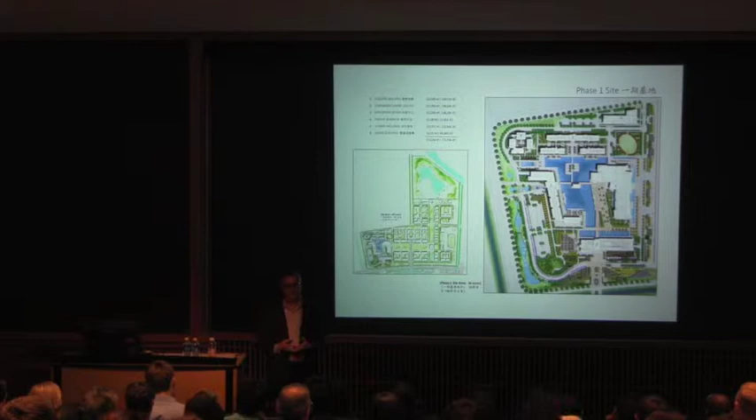One of the things we recognized is there's appreciation for landscape and being part of the landscape, so the buildings and the landscape needed to work together. The other thing is Duke had this mantra, which I think is very sound: learning can happen anywhere. So we needed to create a campus where the indoor spaces, the outdoor spaces, the indoor rooms, the outdoor rooms all worked together to allow learning to happen anywhere.

So what did we do? Well, the water table was basically a meter below the ground, so we pulled it up. We basically said, we're going to create a water quad. So all the water you see in the middle is our take on a quad, and these buildings will be like puzzle pieces that work their way around the quad with bridges that connect them. Then you'll have these landscape moments around the buildings that create an extension of the indoor spaces outdoors — inside out — and you create these learning moments around this beautiful scenery.

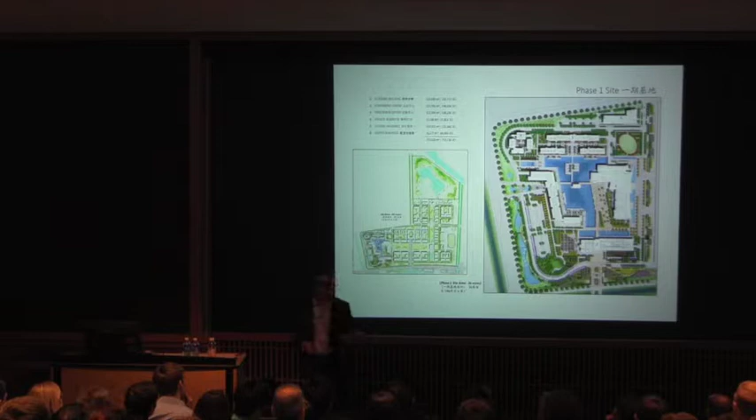There's an academic building, building number 1. Building number 2, a hotel and conference center. Building number 3, a lab and science-oriented building. Building 4, a faculty residence. Building 5, a 200-bed dormitory. Building 6, an administration and service building. They all have this kind of axial relationship.

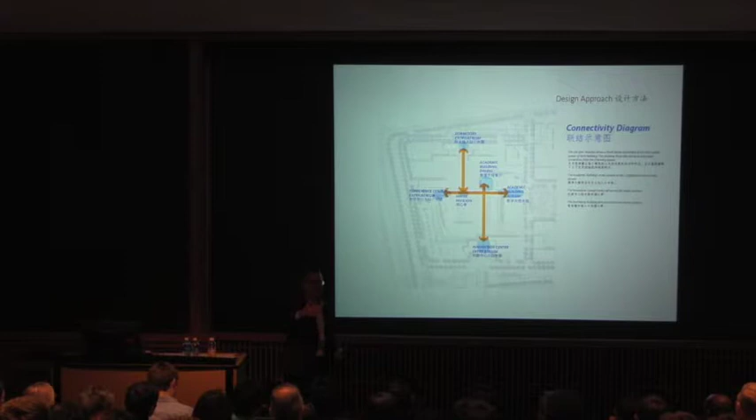As a user at a campus, where normally campus experiences in China are a little more scattered and chaotic, connection to buildings here is very much subconscious wayfinding. I could be in the atrium of one building and look across and see another, and move from one space to the other. I have this amazing experience as I go, connecting with the landscape, but I'm not having to zig and zag all the way through to get from one place to another. And you'll see how we've been diagramming throughout these stories, able to tell a story when language is a barrier, right?

So how do diagrams, which we all do every day, how do we make them as powerful and impactful as possible to communicate, in this case, a user experience both in plan, but also from the sustainability side that could basically bridge the cultures.

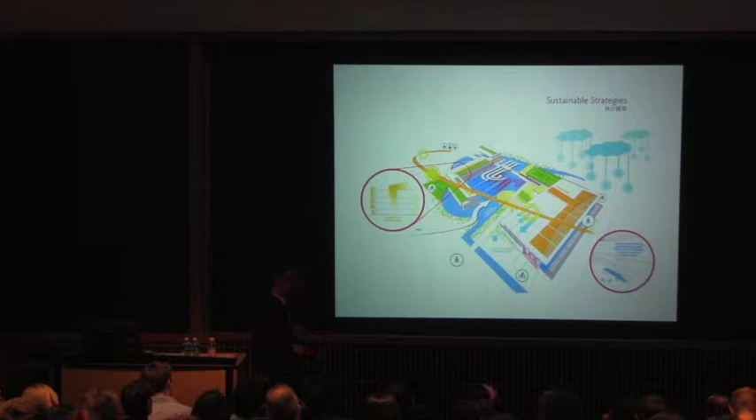The use of glass at key moments in this building was about being more transparent, more open, connecting the East, connecting the West, and having a learning scenario that bridges a top-tier university like Duke with the educational opportunities in China.

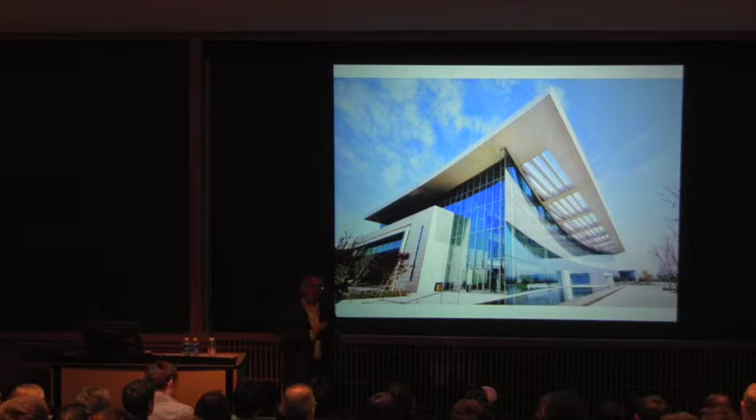So what you're seeing here is a curved glass and a roof that is straight with a slight kick at the end that connects to a lot of the profiles that you see when you go through the old Hutong neighborhoods in China.

Also introducing a level of craft that prior to this has really not been in Chinese educational institutional buildings. What's beautiful and exciting for me as the architect of the project is to go back over there and talk to the people that are users of that building, and there's a pride of place - because a lot of them have worked or been through other Chinese institutions, and this is such an upgraded experience for them that that pride of place translates to a joy of being there.

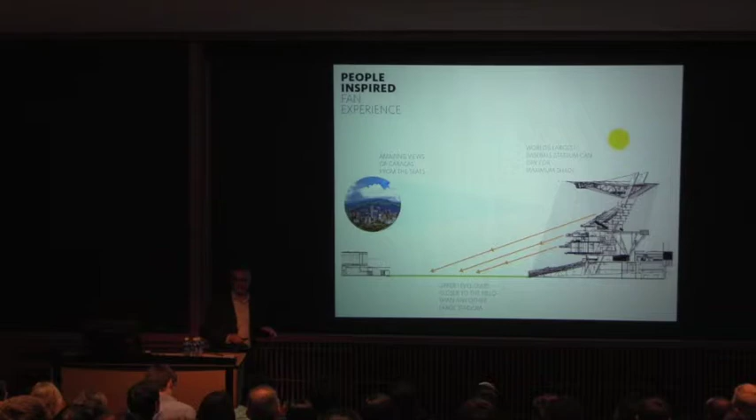So this is the stadium, and you can see the bowl as it works its way around the mountain base and opens up like open arms to the larger cityscape beyond. But it also wanted to tell a story about the colors and patterns of Venezuela, and in a sense connect into the culture.

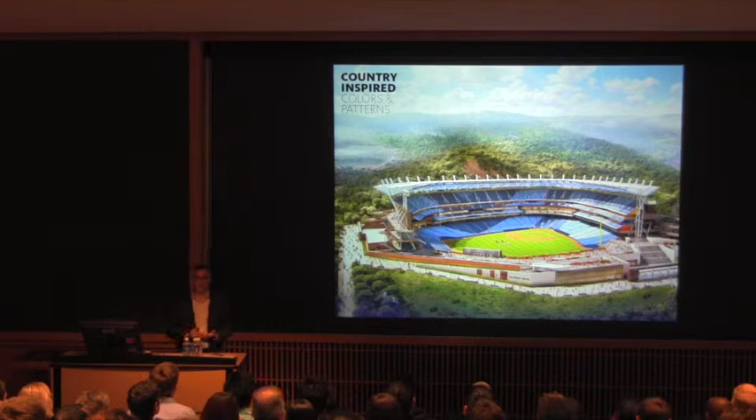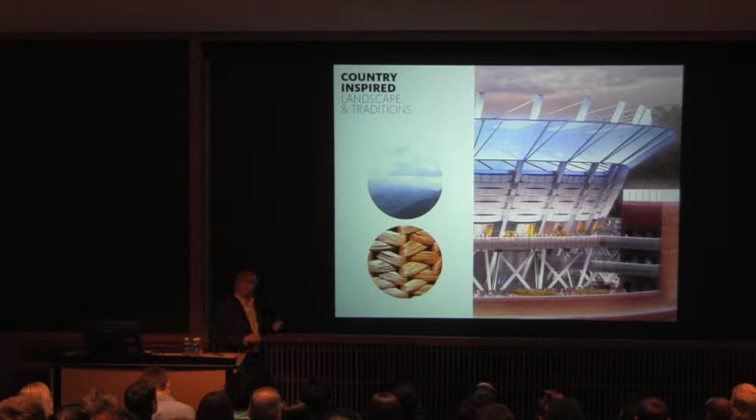One of the things that was really inspirational was looking at the craft evident in everyday culture, the weave. So we took the weave, and what you see there is a steel weave that wraps around the upper bowl of the stadium, creating a really intricate level of detail. It takes what is frankly utilitarian in so many American stadiums and takes it to a level of, hopefully, art in their stadiums.

And the other thing is the walls of the stadium - we thought, why not make them of the earth? So we're using rammed earth technology to take the soil of the ground there and make it into the walls that envelop the larger surround of the stadium.

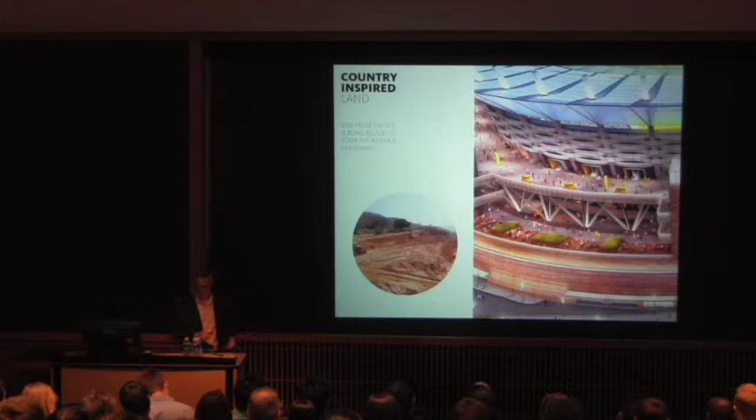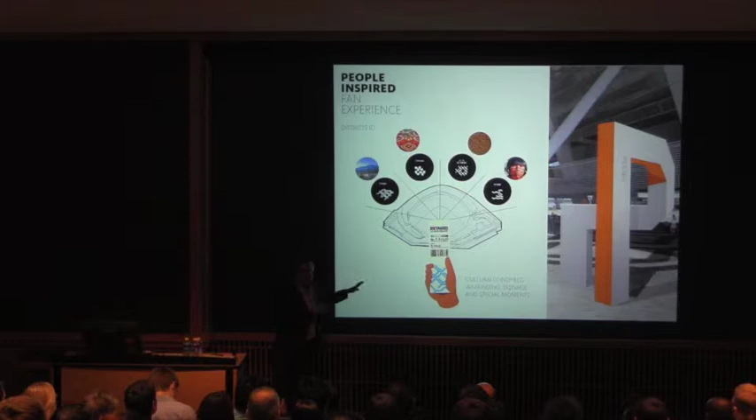And then the beauty of having all that different talent around us in the office is being able to weave in a brand strategy platform that works and creates districts in the stadium. So when you get your ticket, there's a pattern on it, which corresponds back to super graphics and color coding in the stadium, and that weaves its way through so there are districts in the stadium.

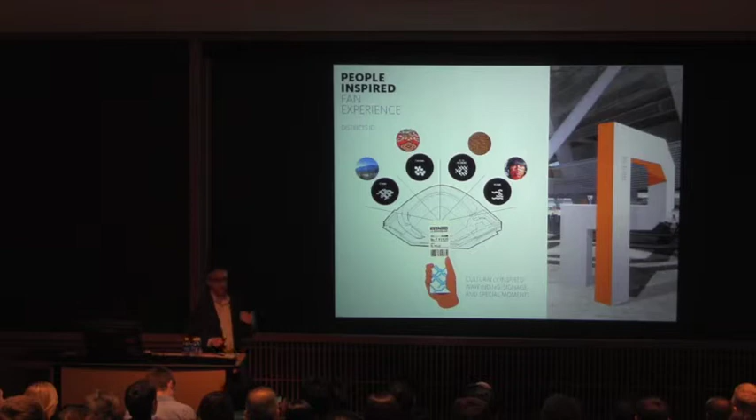Think about that video where everyone's cheering passionately - imagine going day after day of games. This is your family, right? You want to be with your tribe. So when you're with that kind of group, you have a district. There's a way to identify, and it's a way to use architecture as a canvas to tell that larger story and celebrate their heroes. The people who are their celebrities are these heroes in baseball. So we worked to tell that story through the architecture.

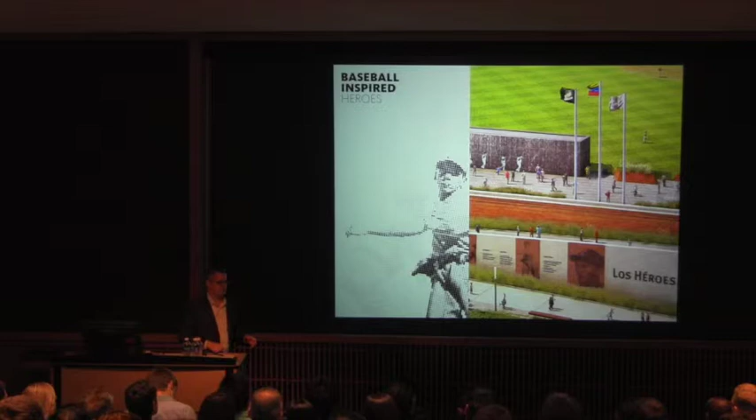Again, this gets back to being able to take that journey from point A to point B. We don't want it to basically be something where we just say, okay, find a consultant down there who can do signage and wayfinding. Let's make it integral to the architecture, and let's take the talent we have and come up with an approach.

Okay, so we went to Venezuela, now coming back to Tyson's Corner, Virginia - definitely still a different language spoken there, but we'll kind of focus it in a little bit.

Tyson's Corner is the project we recently completed, something near and dear to my heart. This is a shot of the lobby, and one of the challenges in Tyson's was its big transformation.

Metro, right, they got Metro. Since Metro is above ground, that means you have to consider how mass transit works and how people move through a community that already had a relatively disoriented urban fabric, or maybe suburban fabric, depending how you look at it.

I wanted to walk you through our strategy, because this was a design competition where the client picked 5 firms to compete against each other. My favorite type of competition, the unpaid competition. Frankly I was out on a limb, because it was the height of the recession, but I said we've got to go after this one. This is a good opportunity, it's high risk, but the reward could be great.

It could be a gateway building for the Tyson's community. So we went after it, and we won it.

The winning strategy for us was looking at the user experience and telling a story from the inside out. What would it mean to be somebody in this building, working there? How would you get here? If you take Metro, what's your way in? If you take a car and drive, which is the normal way of getting around Tyson's, how do you get in?

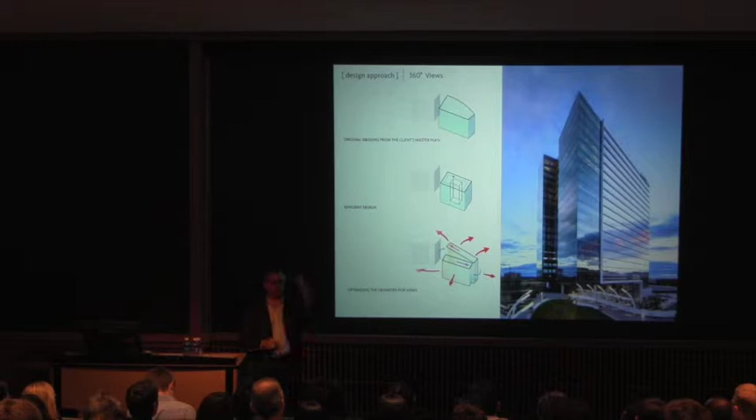What we said is, let's take that site, dissect it, and create two very efficient, plannable bars, so that if I'm a tenant and my business is growing, I have the ability, built into the structure and the space, to change my space around as my company changes. If I'm a tech company growing, I can move and configure without columns being in the way, and I can puncture vertically and connect without destroying the structural integrity of the building.

Then from the skins, how can we use skin to tell a story about an opportunity in Tyson's, to present a new take on the architectural context? If you stood in a tall building there and looked out at Tyson's when we started this building, you saw a lot of buildings that were, frankly, B or C quality. They were ugly, few had any presence on a national stage, and they had a mix of materials that created a pretty depressing context.

This was going to be the first building out of the gate. How do we use skin to put our moment in the skyline in a way that's a little more timeless, that represents Tyson's future, not Tyson's past? That recognizes the urbanity of connecting with mass transit, and that breaks the scale down so it can be that gateway building propped out on the beltway.

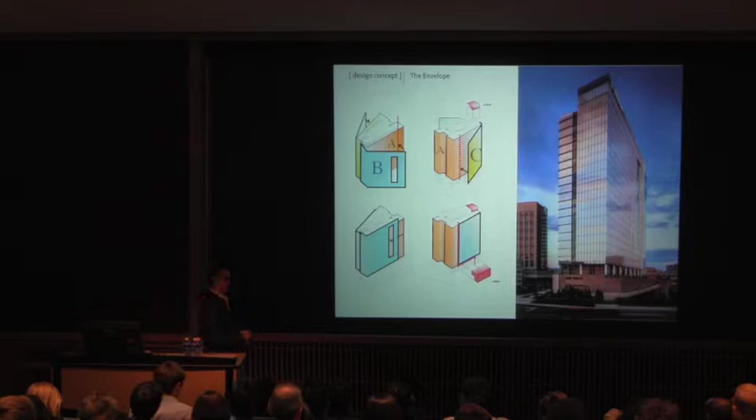So what we said is let's embrace the idea that there really is two ground planes at Tyson's. There's the ground plane we know, and the new ground plane vis-a-vis all the elevated tracks and elevated stations going in there. So let's be first out of the gate to bring people together and let that lobby be the mixing bowl, so even though you're coming in at two different elevations, we can bring you in and reorient you. Each spatial experience can be grand, but your way of accessing the building is, in a sense, common.

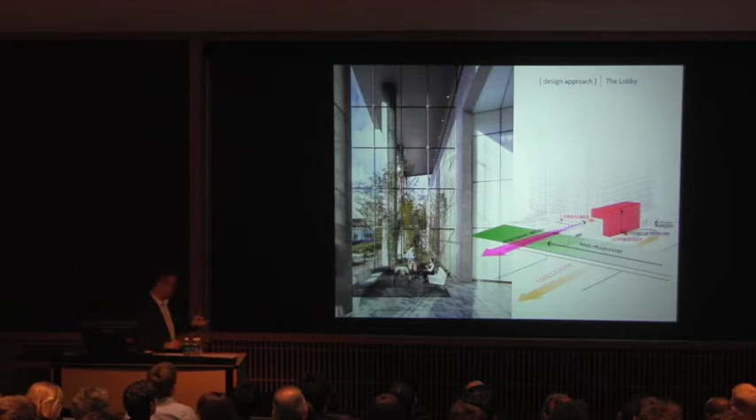So what you see here is a 55-foot by 110-foot cable net glass wall. It's a very minimalist approach to a glass wall, and it creates more of an ephemeral boundary between that drop-off area above and below and that lobby space.

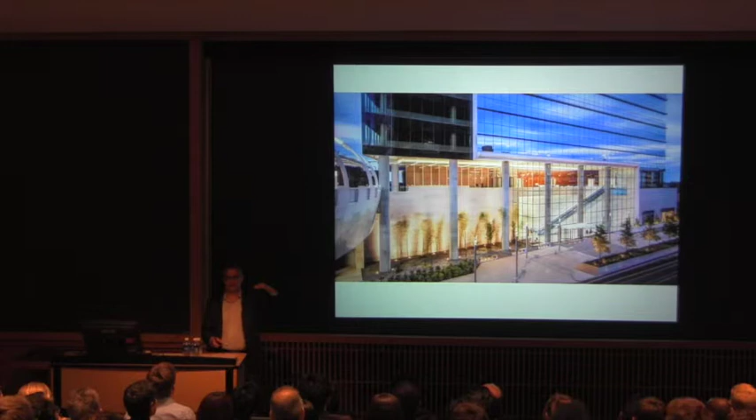Where you come into the space, if you're dropped off, you go up to the main level, the plaza level, which then connects right into the mall. They built a whole giant platform, an elevated programmed outdoor plaza with landscape, softscape, hardscape, that goes right into the mall and connects to it. So now we're embracing that with this lobby.

What's awesome is you go into this finished product now and walk through it, and the spatial experience is great. People walk in, they're not disoriented, they can get around. They've embraced the metro, they've embraced the fact that Tyson's still has cars, and they've been able to lease this building up in a way that became an amazing national story—it was 80% leased before construction was finished, which is pretty rare these days.

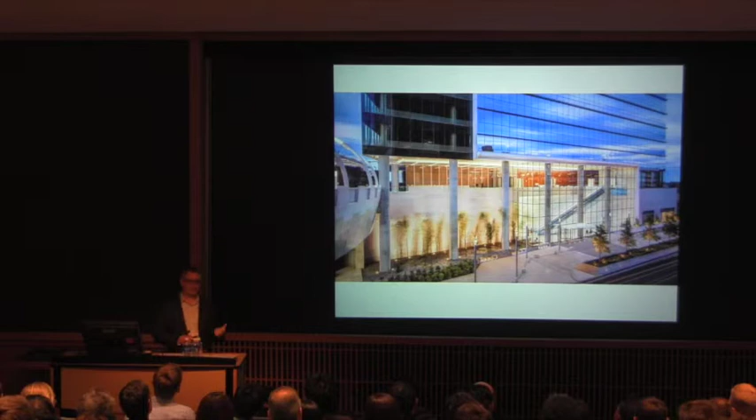For those of you who know Intelsat headquarters that used to be in Northwest Washington, in a pretty interesting complex—this is Intelsat's headquarters now, with a lobby that really opens itself up to the outdoors through this glass wall experience, that has a mix of raw and refined materials which, in a sense, express themselves as they are, but work together as a whole. And a skin story that is experienced both at ground level and up at the top.

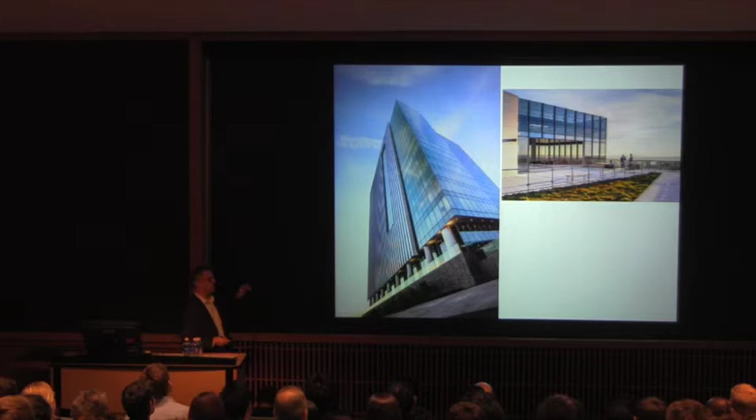And then as you approach from the north, which is my side—I'm up in Maryland, so as I drive south and going across, what do I see? Well, instead of that fabric I mentioned earlier, you see a building that is trying to express a new direction for Tyson's. So, as architects and designers, if you move from that scale—obviously I'm bouncing around in scales, but that's the beauty of what I enjoy doing every day.

I wanted to walk you through this one, because not all of it's public, but it was an amazing ride. So I grew up in DC, in this area.

I used to go to Redskins games with my grandfather on Sundays when they used to win. And I used to pull into the parking lot with him at RFK Stadium, and I would look across the river and say, 'What's over there?' And he'd say, 'We don't know. We don't really go over there.'

As I grew up, I realized that Washington sees itself as a one-river town. The Potomac River really defines Washington. It's the front door, it's the iconic architecture we know, it's the landscape we see. When people come from around the world, they experience the Potomac River, the National Mall, in some way, shape, or form, and all of the architecture associated with it.

Well, there's a back door to Washington, and Ward 7 and Ward 8 are part of that back door. So we had an opportunity—a couple of years ago, we got a phone call asking, 'Would you like to join an effort to bring the Olympics to Washington, D.C.?' And I said, 'Sure, that would be awesome.' But the bigger opportunity, I think, is to think about what Washington wants to be, and how, in 2050, you work your way backwards and allow the Olympics to be a catalyst to a broader master plan realization for the city.

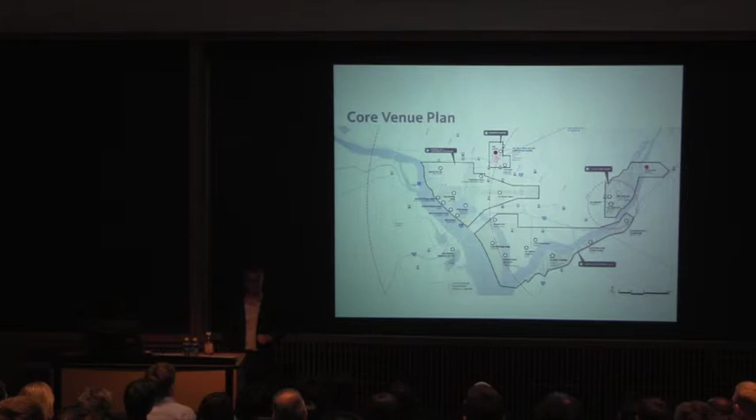So what you see here is the core venue plan. We set up a strategy: what if everybody was to play along? What if the National Park Service and the Secretary of the Interior were to say, go ahead, use the mall, use that land around the Lincoln Memorial, use all these iconic architecture moments on National Park Service land to create a games. Business communities were saying, take my land and let me be part of the story. Communities were jumping aboard saying, let's create a compact games.

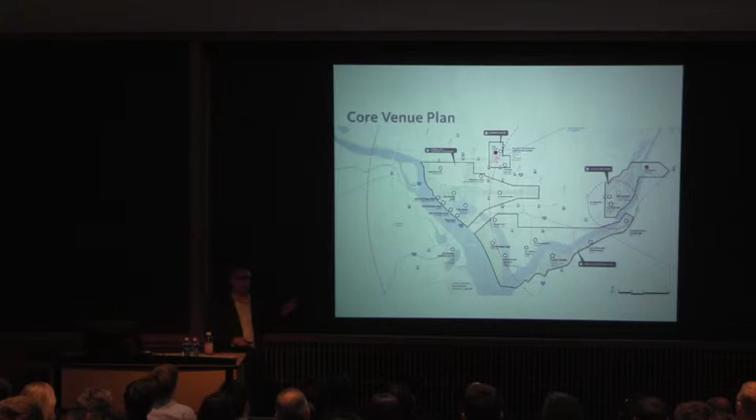So the games you see here are these venue moments where 70% of the games is within a 7-kilometer walkable distance. Okay, what does that mean?

But when you think about that story, you don't want any white elephants. What I mean by white elephants - if you think of Greece, the games - a lot of those buildings are sitting there rotting. In fact, Beijing had that same problem. I've been over there and looked at a lot of them, and they were trying to get new life on them. Winter Olympics definitely helps, they get snow, but that's another story. Still, they have a problem with these white elephants.

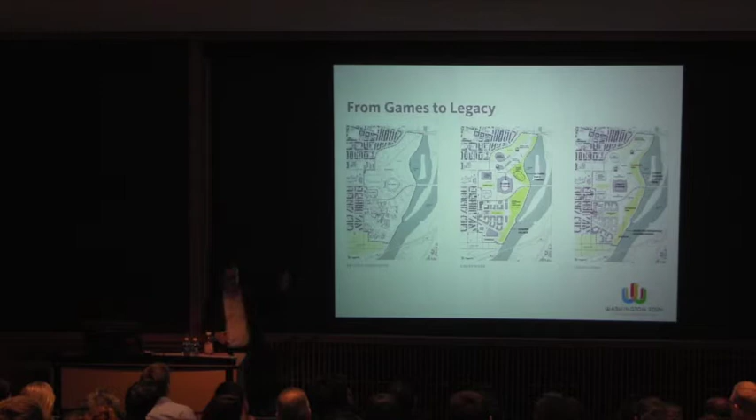So how do we do this in a way where we don't have white elephants? How do we look at the legacy mode for these areas, work our way backwards into a games mode, and look at the existing conditions to see what needs to be transformed? Some of these diagrams do that. But we also said, why not have some of these moments be inspirational?

JJ and I have a colleague, this woman named Maddie, who's in our marketing team, and it turns out she's an Olympian - the 6th best swimmer in her sport from the Sydney Games. She came in one day during a planning session and said, look, I just want to tell you, as an athlete, when I was competing and getting ready to go to my event, I got in the boat from the Olympic Village, and the boat was going to take me over to my venue.

And I was focused on what I was doing, and halfway across that boat ride, I looked up and I saw the Sydney Opera House. And it was in that moment that I had the chills, and I had that impact that I am here, this is my moment, and I will forever remember what I'm about to do.

So how do you do that in our neck of the woods? Well, we said, why not have these events? To the right is beach volleyball in West Potomac Park. So you're in the shadows of the Lincoln Memorial for that, for field hockey, for all these events that are in and around the National Mall. We even got the Park Service to say archery across the reflecting pool is an interesting idea.

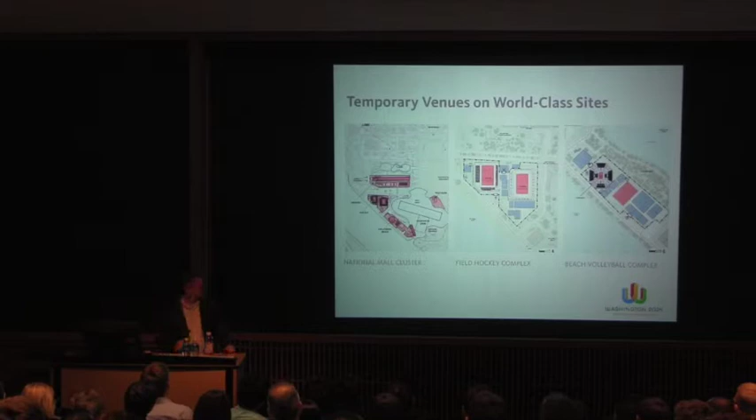So this is the DC that you know, with the games dropped in. And it doesn't change the city so much, but it starts to affect areas that are, in a sense, sacred spaces, right? And it also brings together an amazing opportunity to tell a story of the canvas of our city in a different way. It's not the politics, it's not the red versus the blue. It's actually a united Washington around a central games that connects in and around all these areas that you previously associated DC for in a different light.

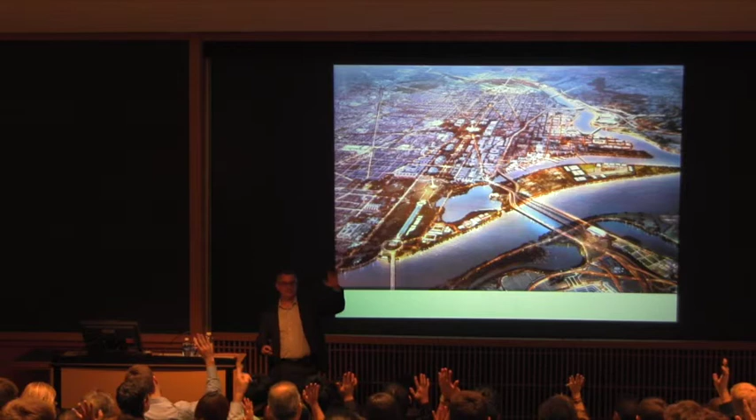So I contacted, when we're doing this, some friends of mine in China that work for a rendering company that actually did the Beijing 2008 games. How many of you watched the opening ceremonies? Do you remember there was this awesome fireworks in the stadium, and then they panned out and you saw all the fireworks going down the river? There's no river. It was CG. These guys did it, and they looped it in with the broadcast feed. So I'm like, these are my guys.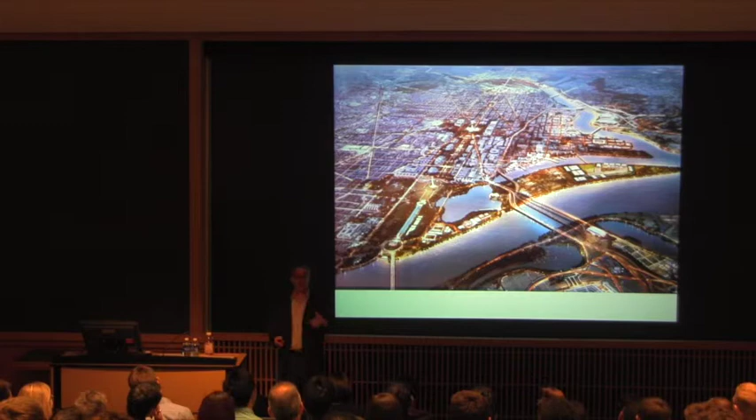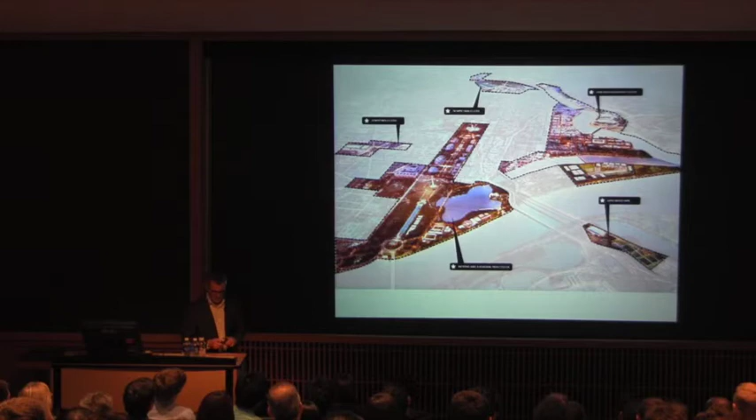So this is the clusters. This is 70% of the games in and around the Mall, right? You animate the edge of the Potomac River, you animate the edge of the Anacostia River, and you tell a new story about the brand of Washington, D.C. in a different light. You take the Hill East, and you connect over to Ward 7 and Ward 8. You animate the east and west bank of the Anacostia River, and then you leave a legacy.

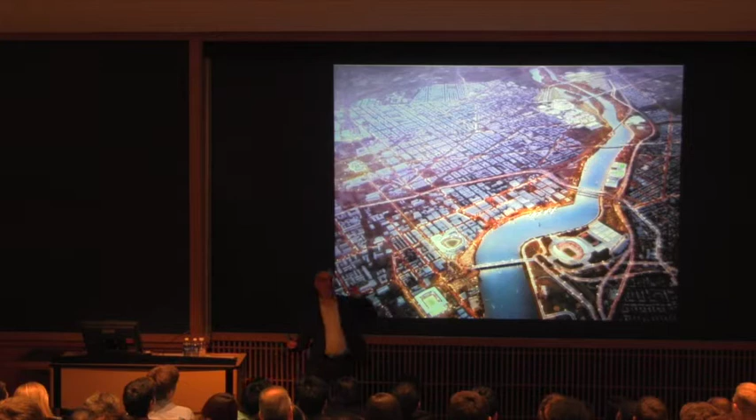And the shocking thing for me, by the way, is you learn things about the community. How many professional standard, professional quality track and field venues do you think there are east of the Mississippi that meet the international standard? Zero. Yes, zero. So we talked about maybe on Poplar Point that you have a track and field venue that is a legacy that you leave back to Ward 7 and Ward 8, to the colleges, even to national interest. Why not, if there's a Penn Relays, why not a DC national relay? And the amazing thing is all the schools said, yeah, we're on board, we're interested, talk to us more about this.

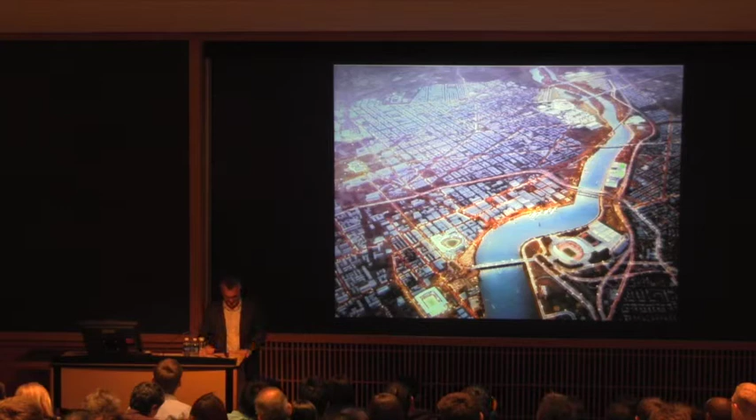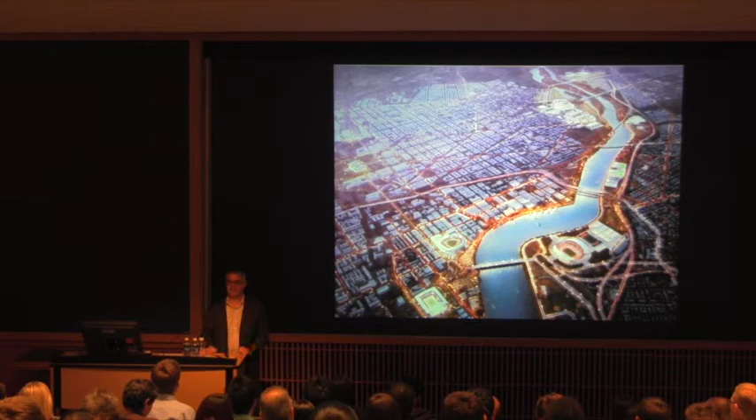So we didn't get the bid, right? And the amazing thing was, I remember the day of the pitch. There were two pitches, but the one I was in was kind of the first one. And it was fantastic. So I went in and I told a story about growing up in DC and about this canvas and about this ability to have our city, a world city, the only world capital, in the sense of the power capitals, to not host the games, to have an opportunity to transform our city towards a larger master plan. And the amazing thing is we emerged out of that pitch in the lead.

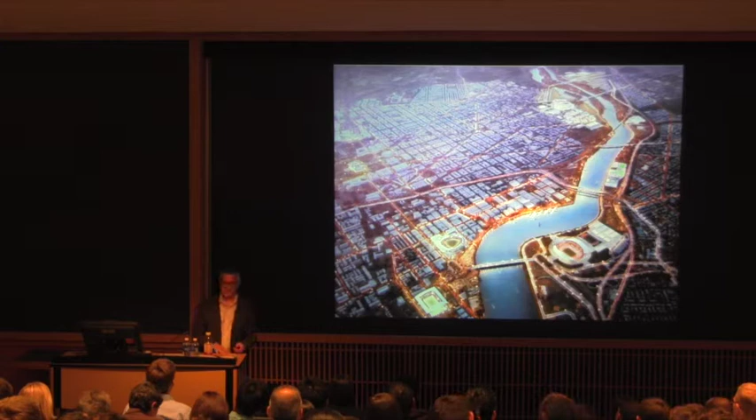And then the politics entered the picture, with the concern that the international perception of Washington would be one of all politicians, and that's it, that's the city. And that the politicians can't get anything done. That's why there are no Olympics in 2024 here. So hopefully we can transform the brand of DC in other ways. Ironically, tomorrow I'm having lunch with representatives from the US government that love this plan and would like to see the land and the facilities in and around the city utilized in ways that better the community.

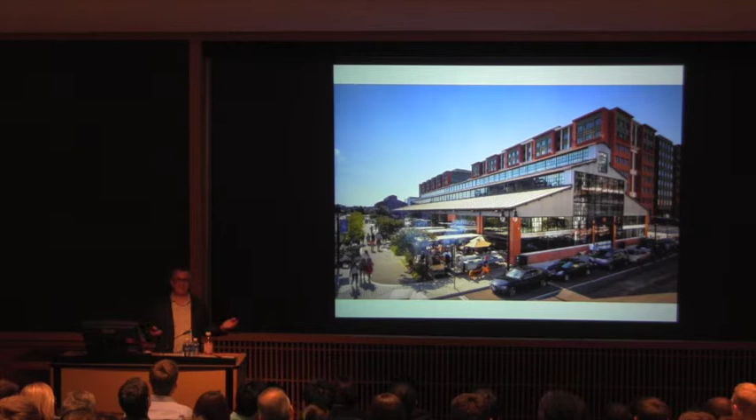Right now, if you've been down here on Bluejacket Brewery, we took what is one big space, put office on the upstairs level and made retail facing out to a plaza on the south, and it's one of the hottest places right now in this ballpark district. This is one of the restaurants that's kind of inline that opens up to the street, and it's fantastic.

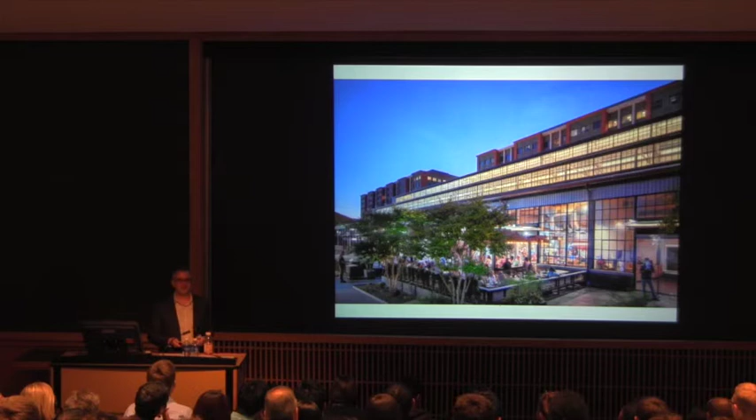In DC, you don't have much kind of industrial architecture that's indigenous to our city. You go up to Baltimore, you've got plenty of it. Being able to take this building and respect the historic character, but introduce a modern vocabulary that creates entry, creates spaces, outdoor and indoor, that are inviting, that are welcoming to the community, and that make these two buildings significant again.

So the Lumbershed building is right there. On any given warm day, you go down there, and this place is amazingly active. For those that are in the studio, the site we're talking about called P2B is right on the other side of that.

What we did for this building is said, let's respect the architectural character that's already there and showcase it. In a sense, create a jewel box, a scenario where we're wrapping that architecture. You still see it, you preserve it, and you create multiple uses out of a building that was a singular use. But you use the architectural materials in a way that tells that story and kind of brings the outside in. The center hall was always open.

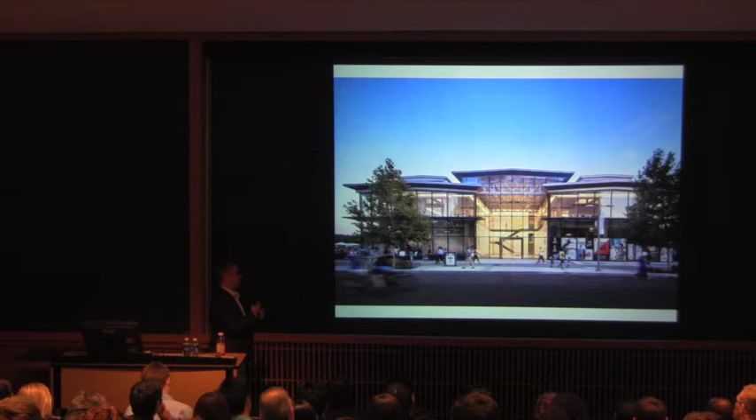There were train tracks that used to go through there and drop off the lumber. So we used the point-supported glass system to kind of loft, give that feeling of openness, and then respect the trusses, preserve that, let that portal in, and then did these bridges across that allow you to bridge the east and west wing.

For the architecture of the skin on the wings themselves, we used the brise-soleil where the slab edge is, to make the feeling of the slab edges kind of popping out. And then basically having a transparent building that speaks about what's going on inside of it to everybody that's outside. It communicates.

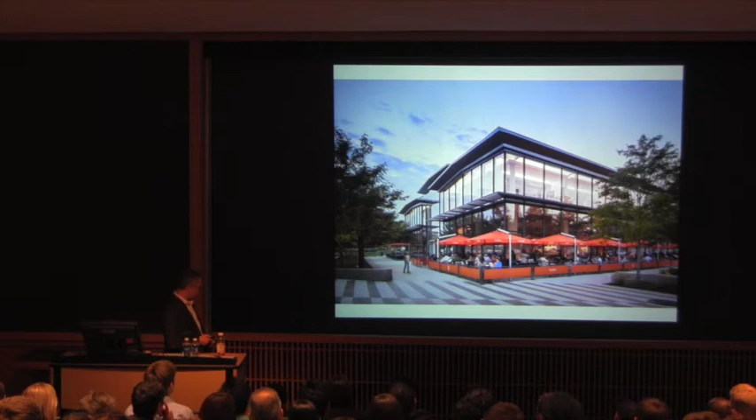Being able to do a level of detail and craft for a building that is very much experienced at that human scale. This isn't a tower, this is 2 stories, both buildings in a sense, and there's a touch, feel kind of scenario that as architects we have to respect.

So to our own space, some of you had a chance to visit this. There's no tougher client, well there's one tougher client, I'll get to them last. There's no tougher client than all your colleagues. And architects are an opinionated bunch, you probably know that, right? Everyone in my office was my client on this one.

We wanted to create a new space that transformed the design shop and literally brought it down to the street, broadcast what we do to the everyday passerby, and said, let's put design on display. A lot of times you go into an architect shop and there's a reception area, some conference rooms, and what's happening in the design process is a mystery unless it's communicated through the course of a presentation. In our case, you walk into the space, everything's on display from the second you walk in.

The space itself is very raw. We took 2 restaurants out, stripped off the facade, and created a space that is studio space, gathering space, and then blasted 2 holes in the building and connected up.

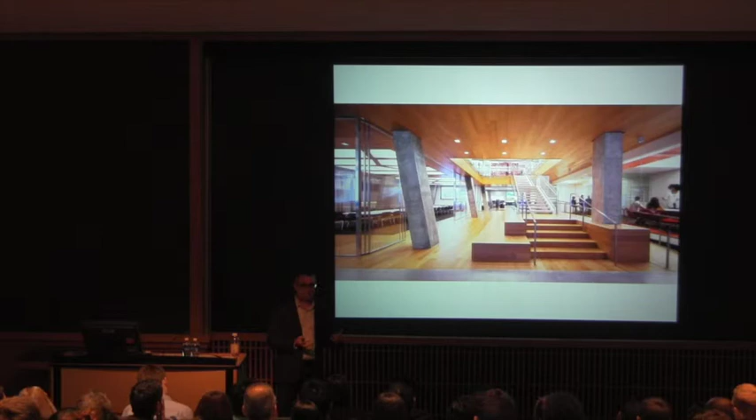But I also wanted to really bring back the making and craft of architecture. Because as a profession, I think we start to gravitate too much to renderings and to being able to produce polished presentation. It almost feels foreign to pull a trace paper sketch into a presentation, right? What about a model? A lot of firms have gravitated towards the out-of-house scenario where models are made in a shop in China, in Asia, or in our case in LA, we're often using a shop.

So at the back of this, you can see the colored glass in the back, it's a fabrication lab where anybody can go in and everybody can go in and tinker. You have an idea about something, go make it, right?

And studios and team spaces create the opportunity to interact with one another on a regular basis. For me, the dynamism in an open architecture office is something I've been fascinated with my whole career, even before that in school when we visited firms. I remember visiting what was now a current competitor when I was in school, and they had people in corners, not communicating with each other, making models, and one hand didn't know what the other hand was doing. And I was like, man, we can't ever do that.

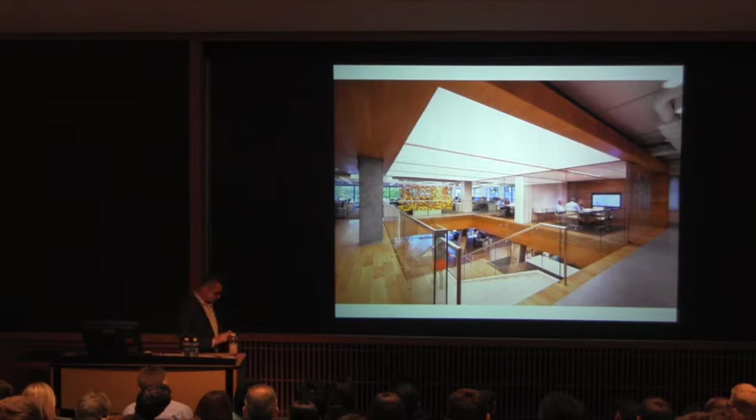So our library is a place that people come together. There's constant innovation of materials being put on display. And that Fab Lab that I mentioned earlier is a place where not only are you in there tinkering, but people see you in there tinkering. And it creates this iterative dialogue, which I think is really wonderful about that idea of making.

And you know what? It's never fully baked. And it doesn't have to always be fully baked. That whole idea that people can continue to contribute.

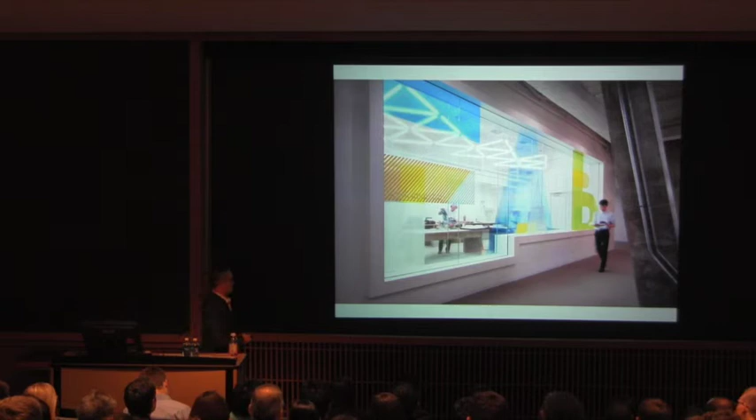So I did want to take you to my toughest client. And I introduced you to my clients earlier that are sitting in the front row. And I wanted to close with this project that Brian mentioned. So this is my house that we built. And why did we build this house?

Well, we live in a cottage house, small cottage house in Bethesda, and we've added on to it a little bit over time. We love the neighborhood, we love the community. But when we said we wanted to build a new modern house, Peter knows this well, working in these areas and doing modern houses, it is hard, one, to find the right sites to do it on, the zoning constraints, the challenges, the community, et cetera, et cetera, et cetera, and the prices to get in and do these pieces of land. So in our case, we looked, and there were bidding wars everywhere, and we said, screw it, it's not us. We're not going to do this.

We're going to stay in our house, and we're going to go buy farmland about an hour and 15 outside the city, where the zoning constraint is, please be 50 feet back from your property line. That's it, folks, that's it. And create a place that we want to be. So we had to start.

So I'm a big believer also in engaging your clients in the process. I mentioned I wanted to be an architect since I was 5, and I started with Legos. So I worked with one of my clients—raise your hand for this client, raise it higher, there you go—and we created a model of what we were trying to build. And I went out with my other clients to the site, and we walked out and figured out where we wanted to situate this building.

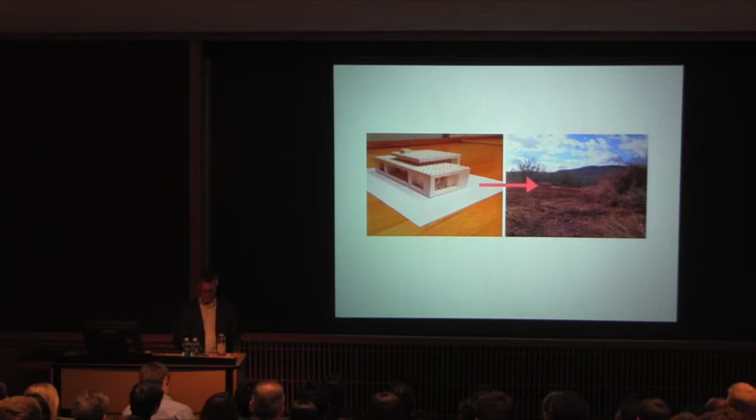So from a planning standpoint, we wanted something similar. The main level, you come in, and what you see is what you get. You have a house with a main room, a great room, that everybody can gather in, bedrooms off of it to the bottom left and top right.

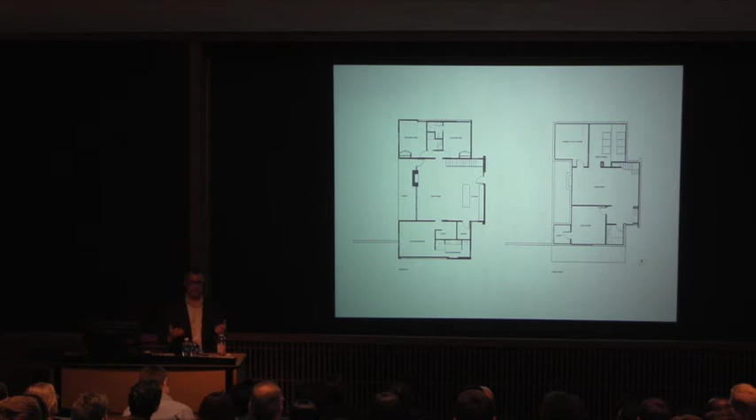With the extrusion of the form, you have this western-facing porch that allows you to capture the sunset both from within the room and from the porch. Then taking that found space on the lower level, given where we situated the house, making that some ancillary spaces that allow us to spread out a little bit.

So what we have is a building that is, in a sense, connecting in with the landscape. It's engaging. What I like about that is, for me or for my clients, whenever we are out there, you can't help but experience that landscape. You're constantly engaged with it. For me, that's my Zen moments, being able to get out there and do that, and hopefully for them as well.

Being able to use a material palette that is very simple: stone that connects to the farms out there, white stucco, and mahogany siding that plays up on a modern interpretation of the barn doors and plank siding you see in the barns and farms that are the vernacular of the countryside there.

And have this thing float off the hillside in a way that the master bedroom, you're perched out there and you really take advantage of the sun.

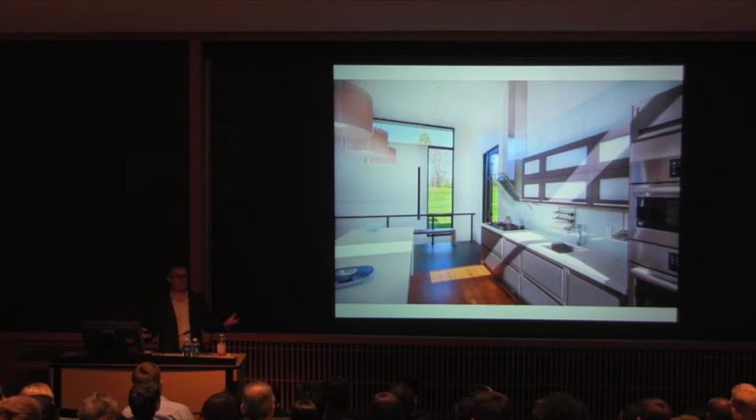And then having those views that connect to the mountains beyond, no matter where you look. If you're looking up, the clerestory captures the sky without the landscape, and it provides that color on the wall. If you're looking out at eye level, then you connect with the changing seasons, and you do so in a way that you can't miss it.

And the building itself opens up to the west in a way that the landscape around it is raw, but it does it in a way that it literally is a level of transparency. Back to that cube project, Brian, that was my inspiration, of solid and void playing together, and being able to affect a delicate touch and not go too far.

In our case, this is a budget, so how do you do this in a way that you respect your budget and you edit, which is another thing that in the designer's toolbox is a tool that's not often pulled out enough, editing our ideas down to the minimal expression.

And as a quick recap: always think about your audience. So for the project we're working on, we were fortunate enough to meet our audience, to meet our client, Big Rental Studios, and hear from them about their vision and where they want to go and how we can help take them there. And to think about the day in the life in the space or place that you're creating.